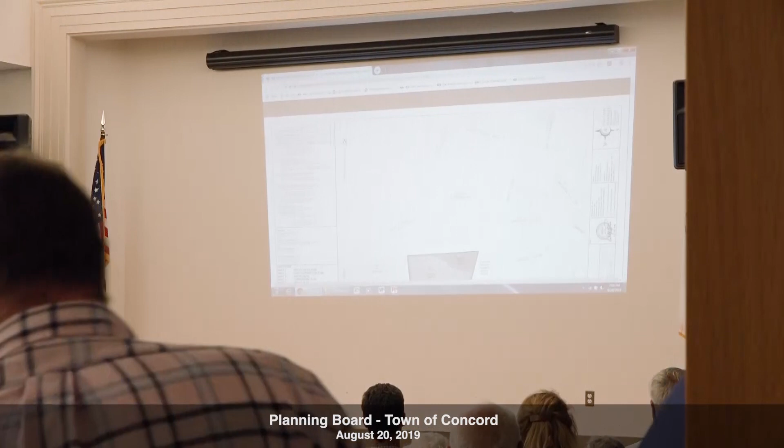At the top left you'll see the map that tells us the number of dwelling units, etc., that you saw before. There's no change to that information. We have 36 units proposed, and we have the required open space, etc.

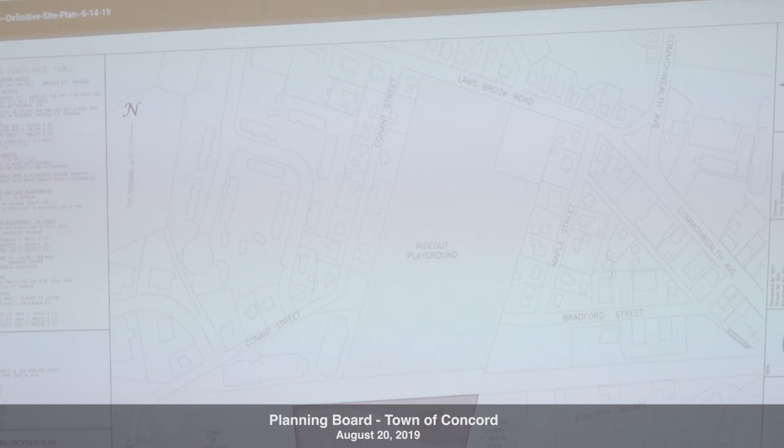As you scroll down, you'll see the development portion, and you'll see Highland Street to the right. We have frontage along Main Street. We have Daniel Hayes Park along the front, which you'll see in more detail. And we also have Center Village on the left-hand side of this location.

We also have the town of Concord land on the back and the commuter rail over here in West Concord. Junction Square open spaces here also, and their plans and deeds talk about keeping that open as a park.

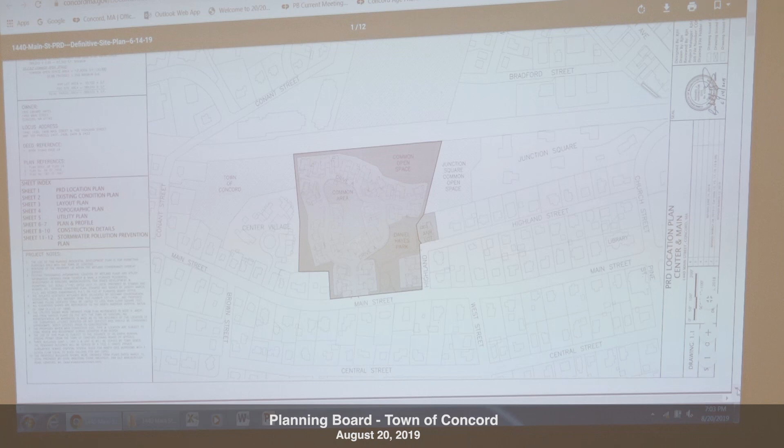Next page please. We've been receiving communication back from various departments and your consultants for the stormwater. We've reviewed those all, and we feel that we can address them with typical comments.

This is your existing conditions plan, and basically what it shows is that along the main frontage of Main Street, we have the sidewalk, the sewer connection, and the water. And then we have two dwellings at this location at the top of the hill, a single family and a two-family. Your record cards show that there's a total of 6 bedrooms.

As we talk further with the water district, I'm speaking with Alan Cathcart, there's going to be a net addition of 3 bedrooms to the town sewer, which is only 330 gallons per day, below the 1,000 gallon per day requirement, so we don't have to go to the commission for that. We just need Alan to do an administrative approval to change from 6 bedrooms to 9 bedrooms for the 3 dwellings. So we have 3 dwelling units today on town sewer from the sewer connection right to Main Street to the sidewalk, and we'll have 3 dwellings tomorrow with that project.

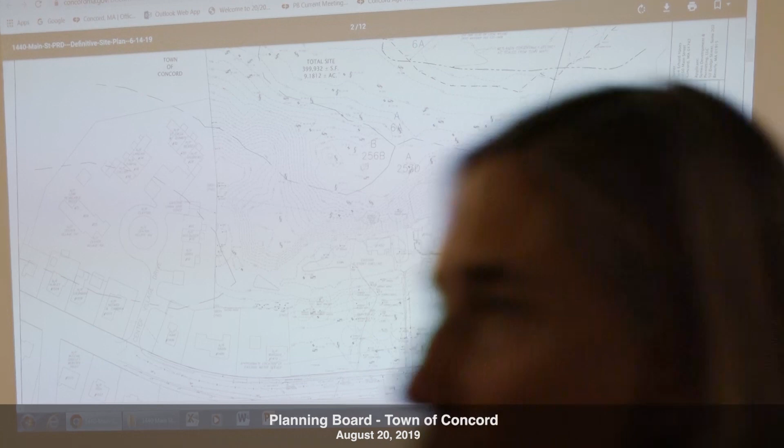The driveway is paved right now to serve the 2 dwellings off of Highland Street to the right. That will be converted to a 5-foot wide sidewalk. The curb cut will still come into this area, which will be the future park. You'll also see this existing path down the back, which we're going to keep as well, making it handicap accessible, as another access point for walkability down to the back of that location.

Topography-wise, we already looked at this in great detail. Left to right is basically flat along Main Street. It's very level along the chain link fence, a 6-foot-high fence along Center Village. It begins to drop down in elevation to the lower area of the back along the railroad tracks, where we have an isolated wetland that's been confirmed and reviewed by staff and the Natural Resources Commission. Next.

This is just the record plan, which shows that we've provided the common open space for Daniel Hayes Park, along Main Street, and also this L-shaped connection so that you can walk from Highland down where the driveway is, and into the front, into the middle. And then we also have open space along the back.

In addition, in talking in great detail with the abutters, the Marquis and the Center Village folks, there was a desire to not just have the 20-foot setback along this edge, but to increase that setback.

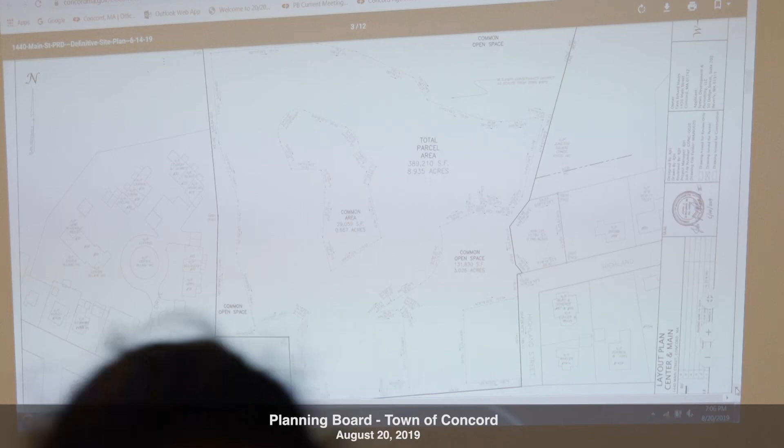The best way to increase that setback is to make it open space. So what we did was curve it away in this detail, and then bump out to this location. The area in the middle is our own dedicated common area, with homes fronting around it, and an open grass plot of land with our septic system underneath. That's extra space, our backyard if you will, but we're letting people come on in. It's an additional benefit you don't typically see in a PRD.

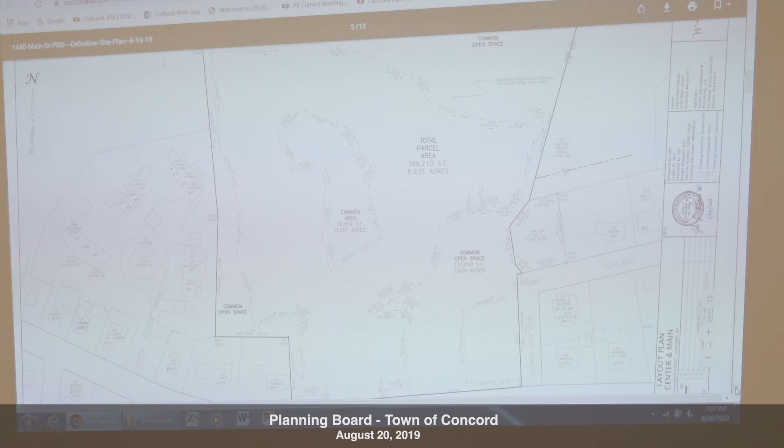If you recall, we looked in great detail at the West Concord guidelines and the basic minimum requirements for a park or patch of grass. Both our spaces meet those requirements. It's about an acre of land from this point, not including the tails, and this area is just over 25,000 square feet. So it's a nice, very large area for active play in that location.

Next slide, thank you.

What we have is the grading you saw before with the sidewalks, with no change except we had a double sidewalk here at the entrance, one going down the back and one into the park. We simplified that into just one sidewalk where the pavement is today. There were minor adjustments to the grading, and as we talked about before, the walkability of the project and making it accessible throughout the entire site.

The one way we achieve that is to stay below 5% grade. As you go from the sidewalk along Main Street, it's very level in the front where the homes are along the entrance, then drops down at 4.6% this way, and also in this direction, down to a low point from here.

Lost my train of thought.

So what we have is the rail station down the bottom, and we talked about the different types of dwelling styles, which Elise will talk about further. We have a paved path down to the bottom for walkability, to travel throughout the entire property by foot or bicycle, and connect to existing sidewalks down to the town center of West Concord. In addition, we share a common boundary line with the town of Concord parcel, which is the open space that was the PRD next to us for Center Village.

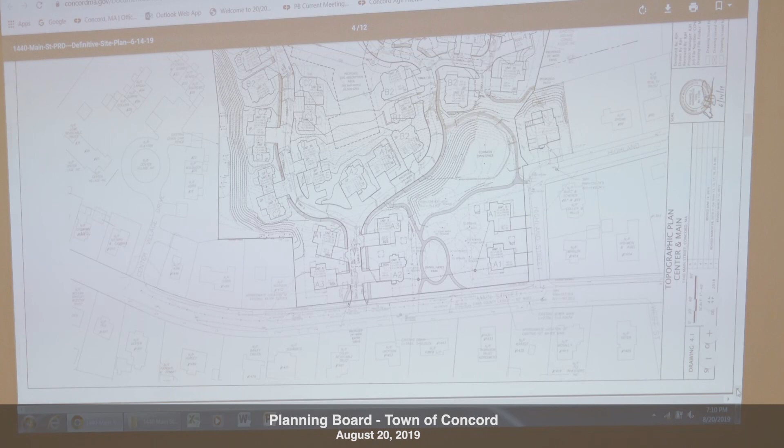So we have a 12-page set. We talked before on a concept plan, it only had 4. So we have additional detail. We have the 2 homes along Highland Street, along the driveways at this location.

Those 2 will be on town sewer along with this house here. The existing sewer line that's there, we're going to reline it and it'll be good as new, and then we'll connect these 3 dwellings to the same location where the current 3 dwellings are flowing to.

The water line is going to come off of the main, come down and loop around the project, and then up the path and tie into Highland Street. The reason for that is so that we don't have a dead end, and it improves the water quality and flow for the entire neighborhood, so that you have water moving throughout and not stagnant.

We'll have fire hydrants along the entrance and at detailed locations along the way, at the right spacing for the fire chief.

You'll start to see that we have a low point here with 2 catch basins, some pre-treatment, and then we have the isolator row and the chambers at that location. We have overflow pipes, then we have roof drywells for these homes at this location, 2 more catch basins, subsurface drainage, 3 more catch basins, subsurface off the tail, low point, a couple more catch basins, 2 on the grass, 1 on the pavement, and those go at this location here.

This left-hand side, basically connecting the dots, if you will. This one is connected here to there, and it daisy chains down to daylight down there.

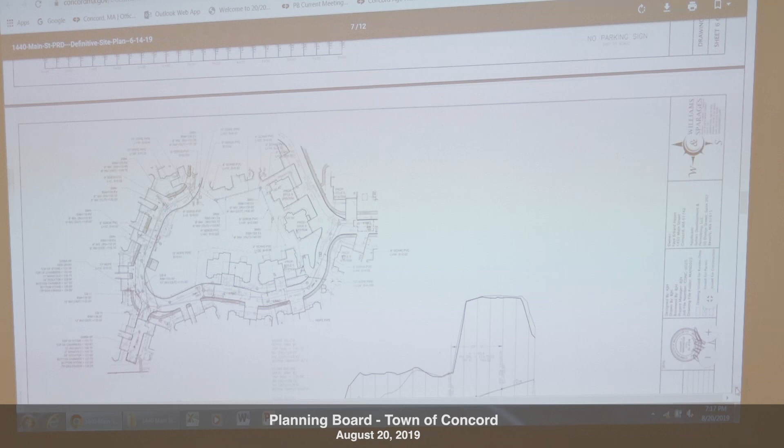With that, I think there's a couple more sheets just to buzz through, Elizabeth. We talked about this, this is just your plan profiles, which shows the grades going down. You can keep going, Elizabeth. And then there's another, the next sheet is the bottom part of the profile with the low point down here, so we're going back up to 4.6%. And you can keep going. So this is the plan profiles.

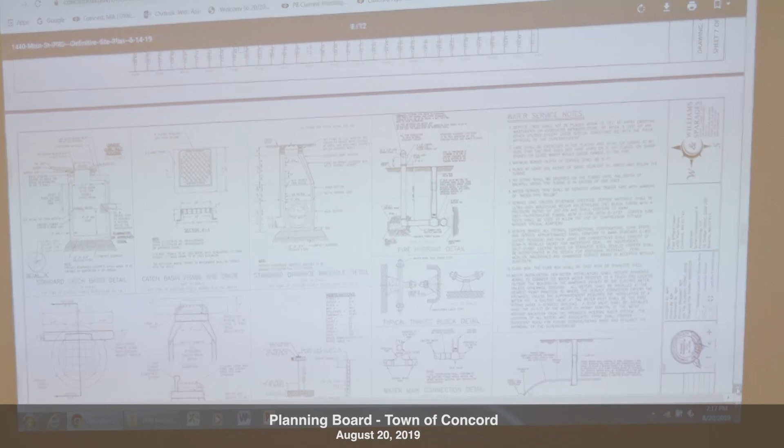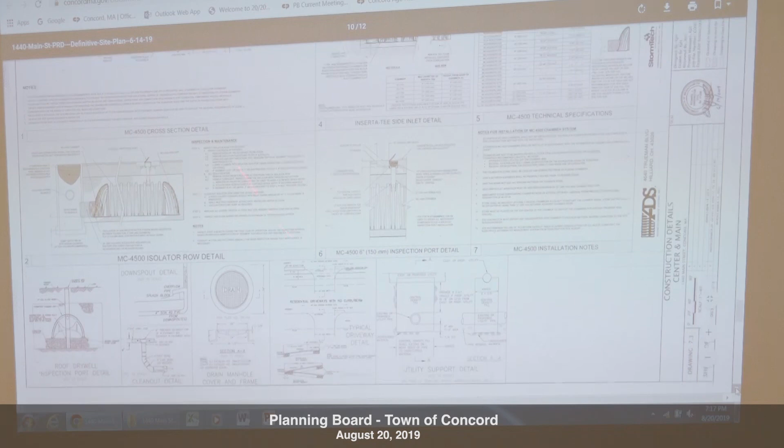All these details are on your engineering website, so all the notes, etc., for all the pavements, sidewalks, tanks, catch basins. And then the last sheet is all our subsurface stormwater and all the requirements for that. Erosion and sedimentation control plans. We talked about having the protection of the mature trees in Daniel Hayes Park. And then Kim Ahern also provided a tree protection detail as well. And these are just more catch basins, silt sacks, all the standard text and guidelines that are from your engineering department. And that basically completes the entire plan set that we have.

And I mentioned that we had the Board of Health response. We talked to Water and Sewer. We're comfortable that we can meet their requirements. There were some comments from the town planner that we believe we can also address.

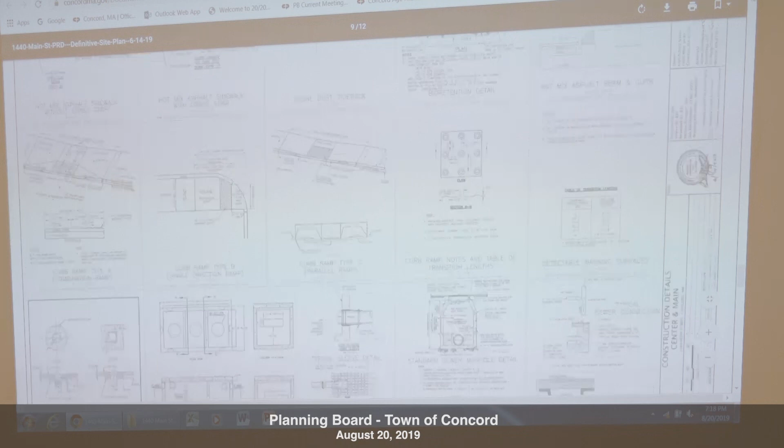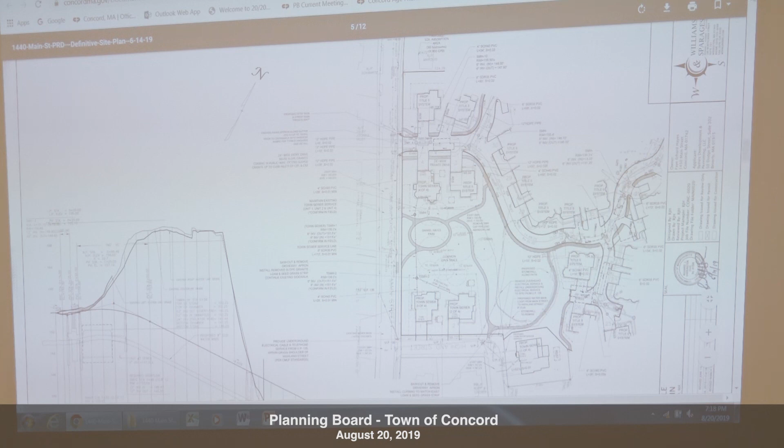In regards to some of the concerns about what's public and what's best for this open space, typically this type of development has a hybrid type of open space where the park is very beneficial. It's along Main Street, and that is a valuable public open space in this area. Is there a need for public access along the sides? Probably not, because it's more to protect the abutters. There's a 6-foot high fence that the abutters wanted to keep, so there's no connection over here. We did offer that in earlier versions, but it was decided that that was not a benefit for them.

So we're maintaining the trees along the top. We have a flat area for additional landscaping along this. And by lowering an elevation over here for these homes, we're also protecting the views across the street, which we had some comments on as well. So you're basically closing the curtain once we lower that area when you're looking in this direction.

And what I'd like to do is basically allow, is it the top at least, or is it? Do you want to go through anything? The architectural plans on file? Yeah, it should be.

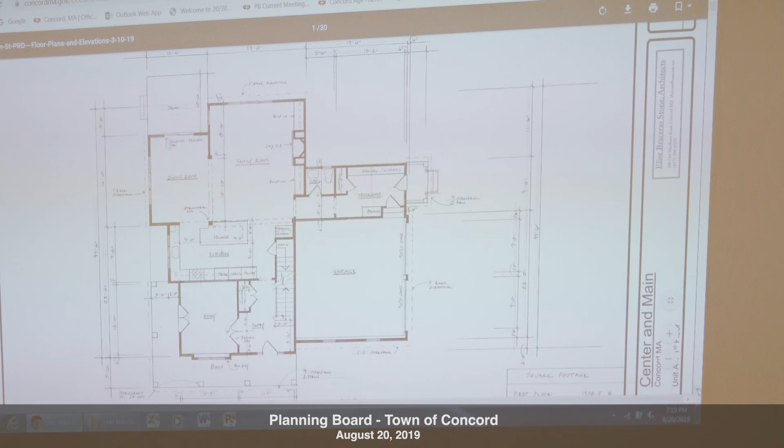So Stout updated her plans based on the last conversation at the meetings, and she can go into detail about that. What you'll find is there are detailed elevations and dimensions along all these sides of the buildings, and we updated our plans accordingly for that.

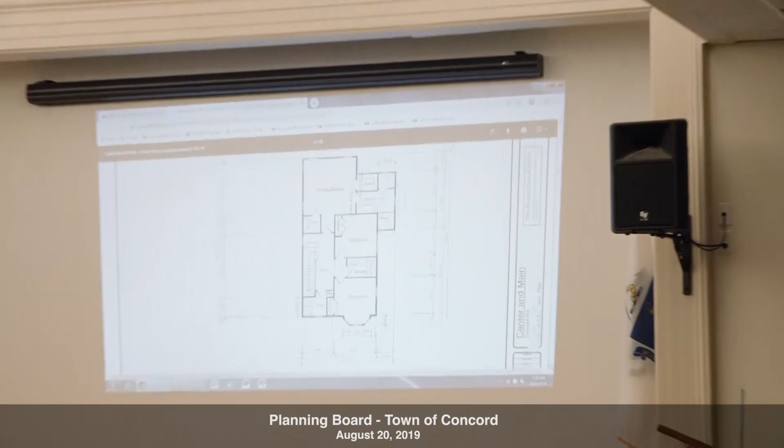So this was A1. Maybe next. So these are, this is the side going in from the garage. So these are just the 4 elevations of A1. So we'll just continue through to A2. So each plan is slightly different. I tried to use elements that you see around Concord so that they all looked a little different. They're similar square footage, but using bays and porches and that.

Trying to get the garages to be set back from the houses, using a village colonial type architecture. We gave them side entrances, especially with the side loading garages. Along Main Street, all the garages will be side loading, so you won't see the garages from Main Street.

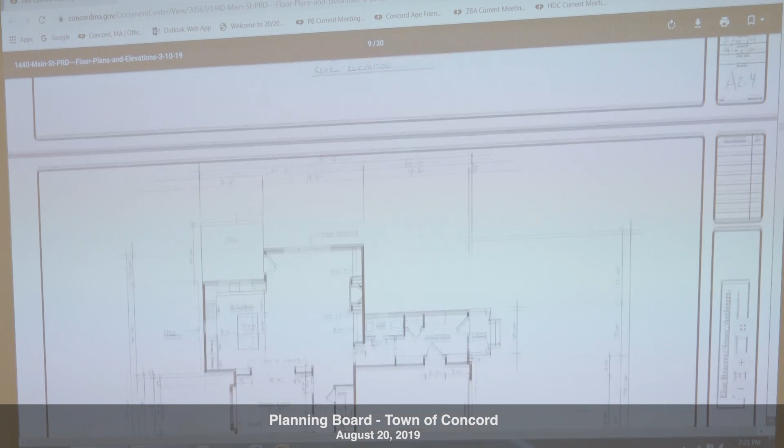So we can go down to A3 now, and keep going. This is A3, so we've used a hip roof. There's a lot of hip roofs around West Concord with just a front porch, not the wraparound porch, dormers on the garage, etc. On some of them we've gone over the garages, and some we haven't, to keep the profile a little lower.

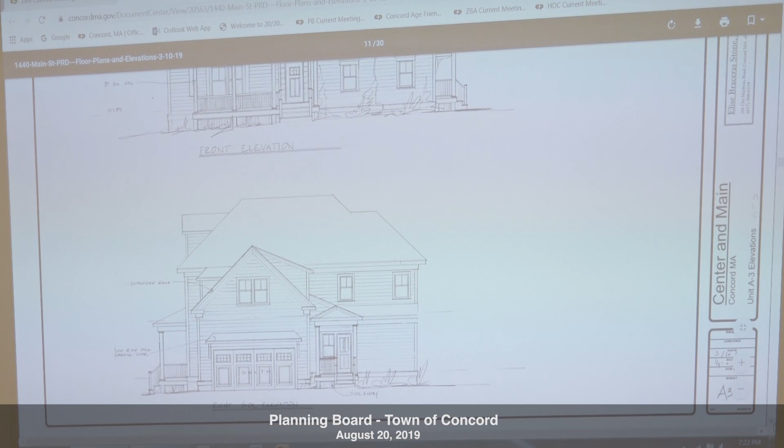A1, A2, A3, you'll see them sprinkled throughout, and the idea is that we really are going to vary them, all the ones shown in the plan. There'll be different sidings, colors, roofs, and porches. So those are the A units. Keep going, these are just the 4 elevations of the A3s.

So the next units are the B units, and originally, if you remember, we had the B units as duplexes. They're mostly along the back of the site, which will be very hard to see from Main Street. I don't think, Rich, you'll ever see the back at all. But they're going to be closer together, and we separated them, so some have 1-car garages and some have 2-car garages.

Again, using a variety of siding, styles, windows, etc., we will vary them. So I thought of this as neighborhoods. One of my daughters lives in Cambridge, and you drive down her street and see how triple deckers have been customized over the years, and they're all the same but they all look different at this point.

So I looked at that as this type of neighborhood along the back. So the B units, there's B1 and B2, and we could vary it by going over the garages and not. These are 3 bedroom and 2 bedroom units.

So we can go through these. Some of the B units, because the way the land drops off in the back, will be walkouts, so there will be some walkout opportunities. This will be down by the train, overlooking there. It will give them some lower level living space. Again, using bays and trying to make it attractive from the back as well, so it didn't look too boxy.

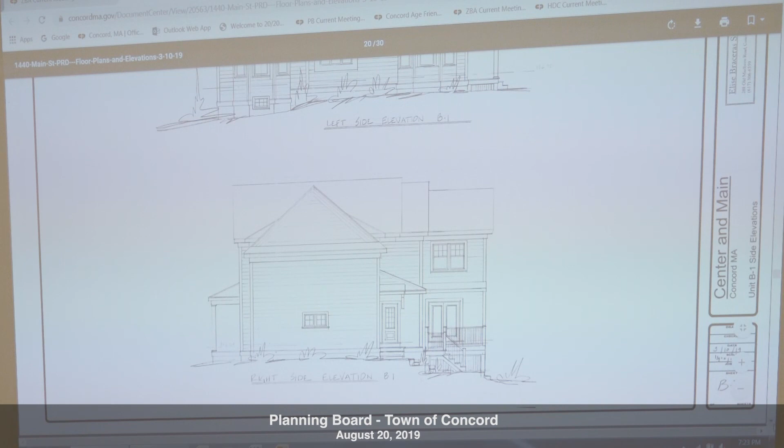So those are the B units. The next units we have are the C units, and these are the smallest units, the duplexes with single-car garages. We put the garages in the middle so they could have the most separation as living units, and feel like they could have light on 3 sides for each dwelling unit.

These units, one will have a master on the first floor. They can actually vary depending on what the demand is. They could both have masters on the first floor, or there could be a master above. These are 2-bedroom units, for the single person or downsizing couple, with a single-car garage, but having them look a little more cottagey. These are on the left side, again to keep a low profile towards the duplexes that are the existing village there.

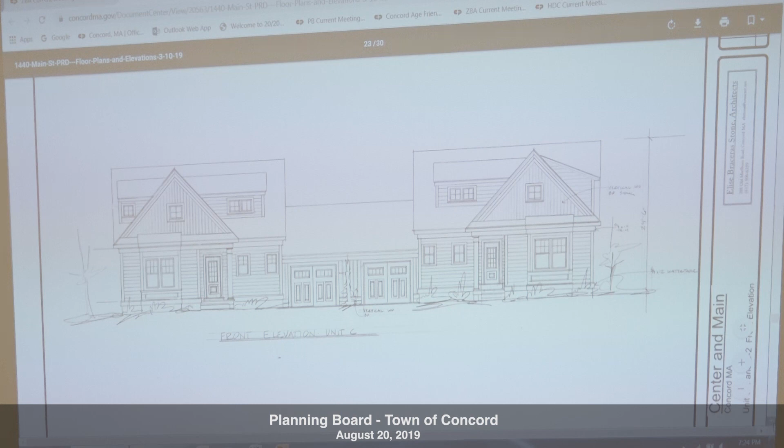So we can show these. When I showed this one, I did show on the plan as if one has the master above and one has the first floor master. Did we already go by that plan?

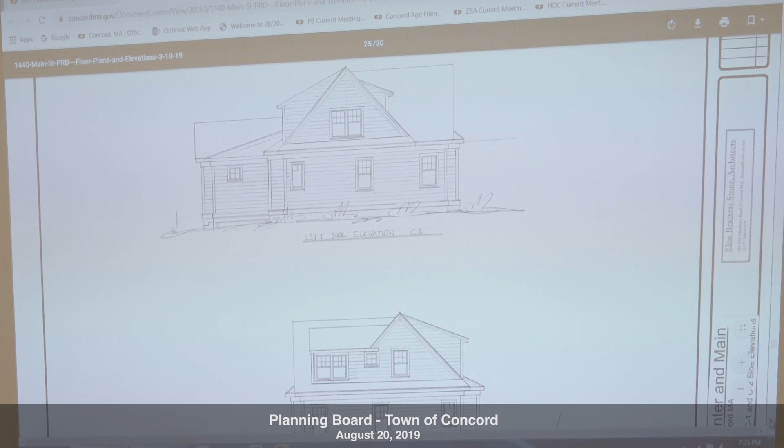So those are the bays, and those are the sides. So this is the first floor plan. You can see the one on the left, it doesn't go out as much, but you have the master. Oh no, I'm sorry, this is not it, this is the next unit. So we must have gone by that. Do you want the floor plan? Yeah, maybe show the floor plan of C, the first floor plan.

So those are the second floor, and here are the first floor. The one on the left has the master on the first floor, and the one on the right has the master on the second floor. Those are about 1,700 to 1,800 square feet.

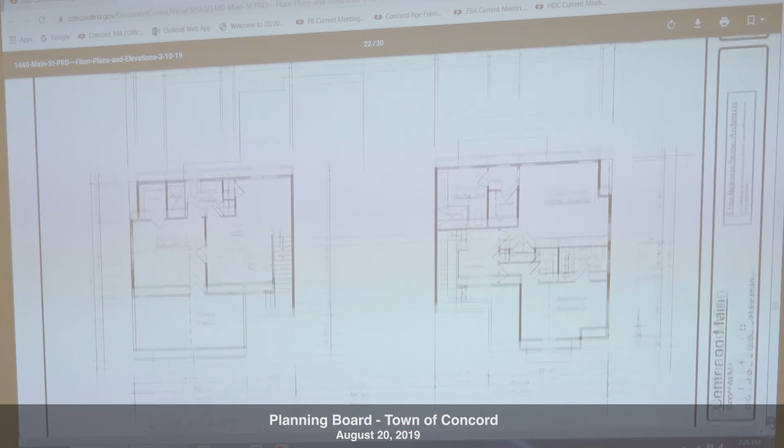So then the last units are the D&E units, there's two of them. Those are also a duplex, where you enter one duplex on the front to the bottom left, and the other unit you enter on the right. The one on the right is a smaller unit with a single car garage, and the one on the left has a 2-car garage. So really, when you look at it, it doesn't look like a duplex per se. Those two are both on the corners.

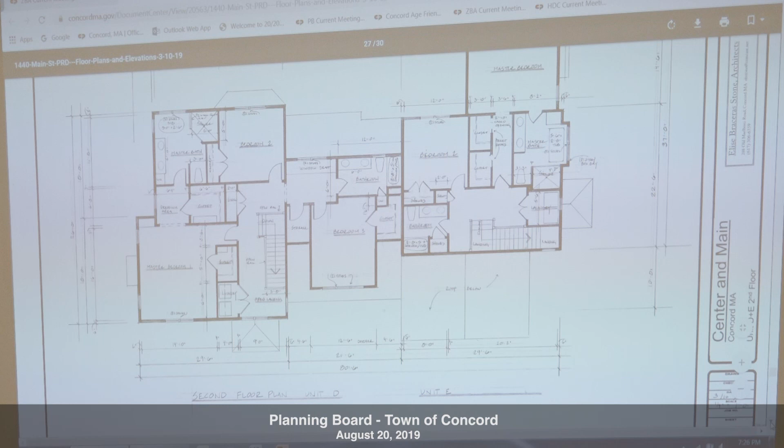So we can show the next one. The one on the right is a 2-bedroom unit, and the one on the left is a 3-bedroom unit. Again, just trying to get the architecture right, so it doesn't feel like all the garage doors are together. I think those are all the units.

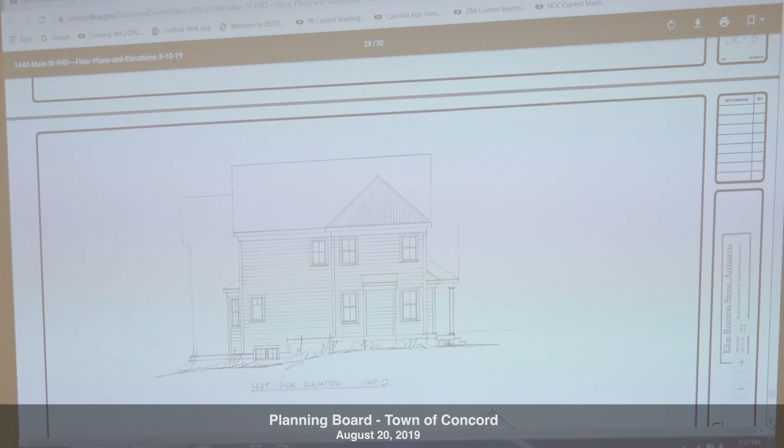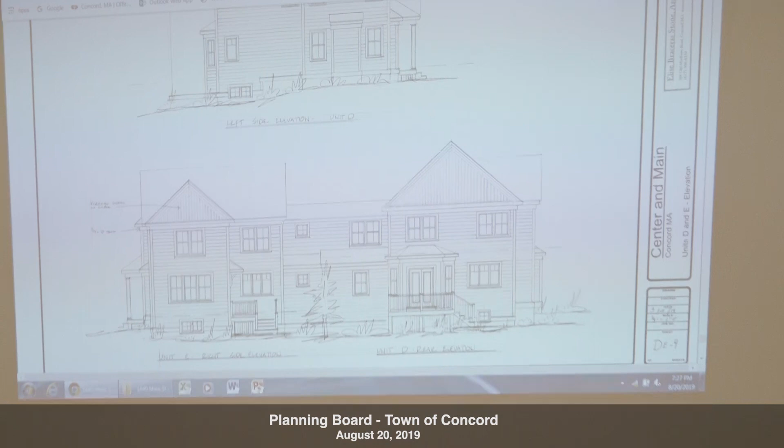Questions from the board?

So if we look at the town planner's report that came up today, some of the open issues—one that I don't think you addressed directly, you did refer to snow, but you didn't really talk about the snow removal plan for the site, so that was one of the open issues listed.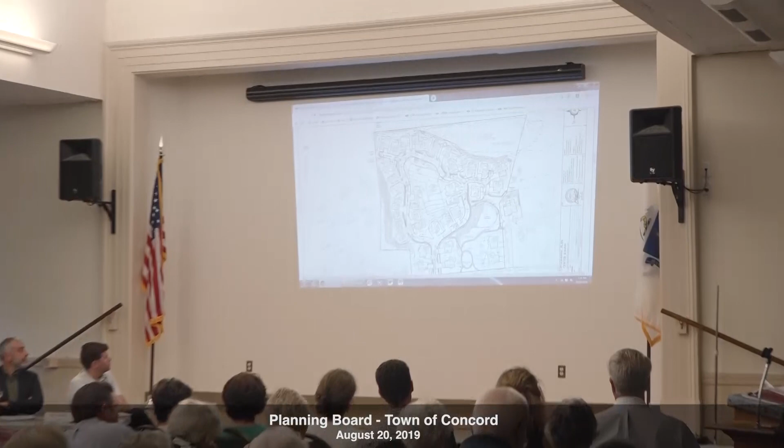This is very valuable for the public to use also. This is also valuable as open space for harmony with the neighborhood and conservation purposes. We're in agreement that it shouldn't be under a conservation restriction just because it's in zone C. Usually they think in zones A and B, they get involved with conservation restrictions because they're larger plots of land with natural resource features. So this would be a perpetual restriction, monitored in a similar manner, but not a conservation restriction - that's what the conservation agent would have to look at.

And then could you review again the square footage or acreage of the different sections of the common open space that are being provided? So the peripheral, the wetlands, and the isolated wetland is the park/green. Certainly. A few meetings ago, after reviewing the West Concord guidelines for park, we made sure that the criteria, the lines associated with the area got those dimensions. And so this is over about an acre of land in this shape here.

And then we have a connection down the side in common with the open space on the abutting property. And there's also open space along the abutting property of Center Village. In my experience, it's always best to marry up each side of the wall or fence with open space and have that common area as opposed to the house being closer. So this will be a common area, then we have a 20-foot strip around the back, and then the wetland area that will be common open space as well. And that meets, as you know, what the rules say - everything that's not a building or reserved for other aspects of access can be common open space, and you just need 25%.

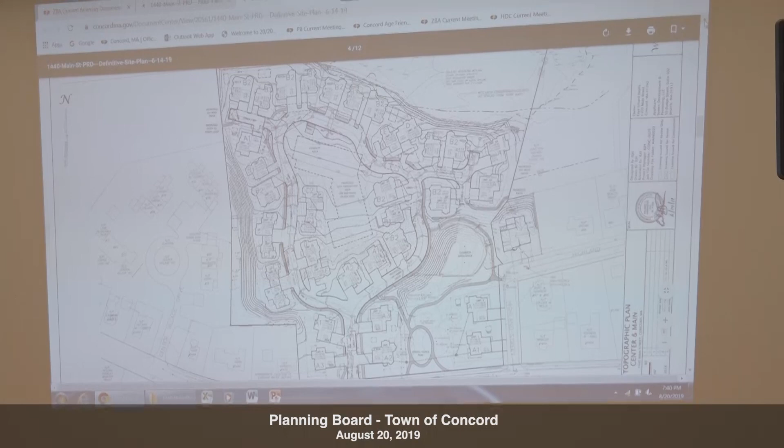So going back to common open space, you mentioned the 25% requirement - there's also in 10.2, 9.1, all the various things that would be the goals of the open space. And you saw the planner's memo and it kind of said no, no, no, and no. Could you address - why we agree, there's pretty much that's a paintbrush across the entire town - how does that apply to a zone C place? What we have is the value of the park, the conservation aspects, and respect of the neighbors, along with the conservation of the back as well. So without additional detail, those parameters are the most important for this.

And when you're in more of a smaller lots, city feel, you're not looking for that 50-foot dimension. 10, 20 feet is at a premium also. So this meets that goal of providing key locations where the open space is, based on all the locations of the abutting decks.

And we turned our houses so we're not looking at each other. A tremendous amount of thought went into the people around the property, and also making it the best possible for the open space.

Yeah, you can tell a tremendous amount of thought went into it, and you seem to sort of maximize where it's put, given the constraints of the topography of the lot and the incredibly high density of houses that you want to be able to put in.

Well, what we have is when we sit down as an engineer, it sounds like the basic requirements are 25%. The time before, there wasn't really happiness with the 26% of open space, so we made it 33%. We feel that made a better buffer along the perimeter. At the last meeting with the board, there was acceptance on this plan, and then we left and came back, and you basically have the same picture.

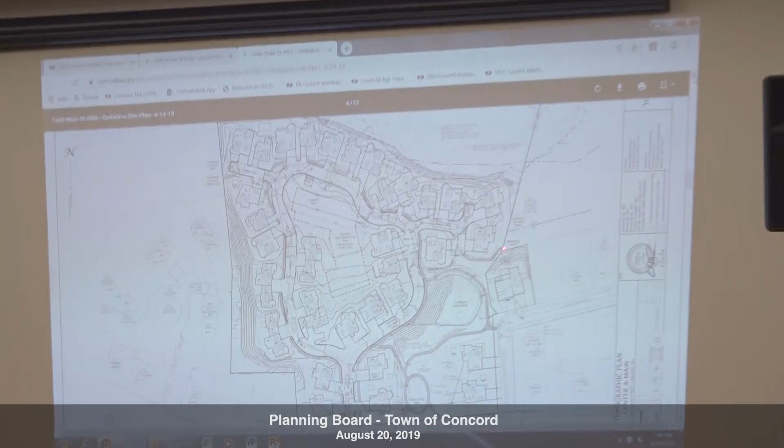And there's not an existing path on that other private lot? No, if you look at their plan of record, it says maintain as an open park, open space. Have you reached out to them about connecting with a path? We have not - that was an early ask by the planning director, to try to allow town land to connect to this open space parcel, and we said absolutely, we'll provide that. We've been able to maintain that through every redesign we had. But you haven't reached out to the abutter? I guess we can do that additional investigation.

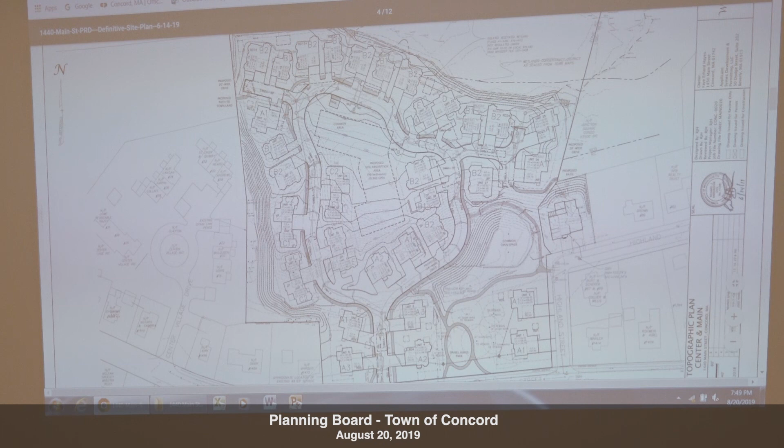I do have one other question, sorry - regarding the logistics of removing the earth, one of the questions raised was the number of trucks involved. At what point do you specify the plan for earth removal - how many trucks, where they go? You'll have that at the next meeting.

I would love to see, and it would be really important for the next meeting, to see those basement plans, including ceiling heights, and whether there's any bathrooms or anything in the basements. Certainly, I'd like to address that - usually with basements in developments like this, similar to Black Birch, we only finish basements when buyers ask to finish them after purchase. So they're really just open plans with an area for a mechanical room. We would never show a bathroom unless it was asked for.

The reason I'm curious is because you're one bedroom away from that limit. Sometimes on plans we see these 'magic rooms' or 'bonus rooms' - I haven't seen them here, but I want to get an idea of the look and feel to see how easy it would be for somebody to add one or two bedrooms in the basement. There's absolutely no bonus rooms in any of these plans, and in any basement you could put a bedroom, but these are just open plans. We will show them, and there's no intent to put any bathrooms in basements at this point.

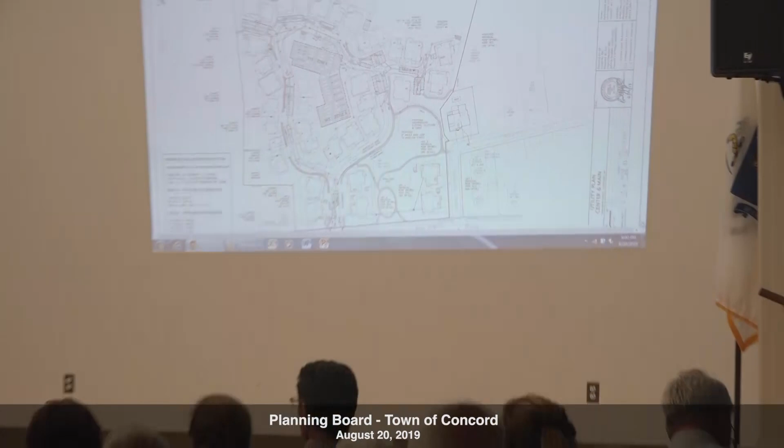Yeah, so I think at this point we've gotten our input from the applicant, and I just want to remind everyone what our job is here. We've been through several rounds of discussions with the applicant, and as the planning board, our job is to provide a recommendation to the zoning board of appeals for whether they should grant a special permit for this project. Also, to provide additional color, if we didn't feel it should be granted in its current form, what modifications we would expect to be made in order to make it fit within the spirit and the letter of our bylaw.

But before that, what we will do is march through each of the criteria to give our planning director some guidance for the report she's going to write up—our draft recommendation—which we will then review at our next meeting along with additional input from the applicant. So that gives you a sense of where we are in the process and what we expect to proceed with from here.

But I think before we go through those deliberations, this is a good time to hear comments from the public. Once again, keep in mind we've got a lot of people here, we've been talking for about an hour, and we're by no means done. There have been comments made in the past, letters received, lots of input from the community, so what we especially appreciate is any new perspectives or insights based on new information or things we haven't yet considered. Repeated comments are of little value for all of us in terms of our time tonight. So I welcome members of the public who have such input to step forward. When you do, announce your name and address, then please share your remarks.

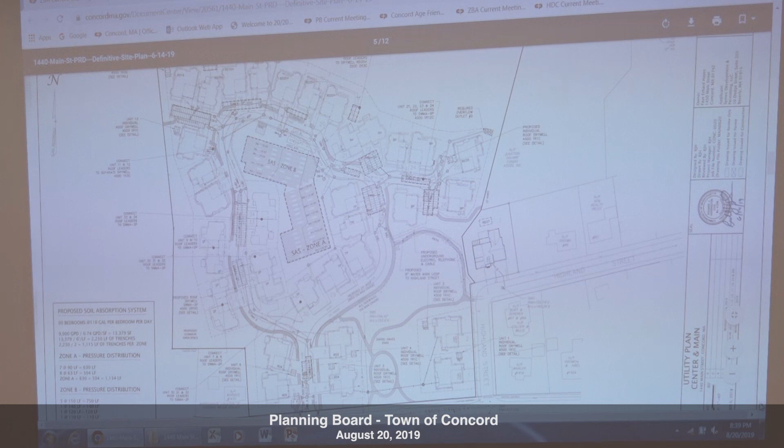As you drive down Main Street, you're not going to see anything behind that red dot. Everything behind here is at a much lower elevation. You will not be looking at Main Street. There was careful planning put into this so that we limited the amount of houses to keep the character of Main Street, which we worked on with the planning board.

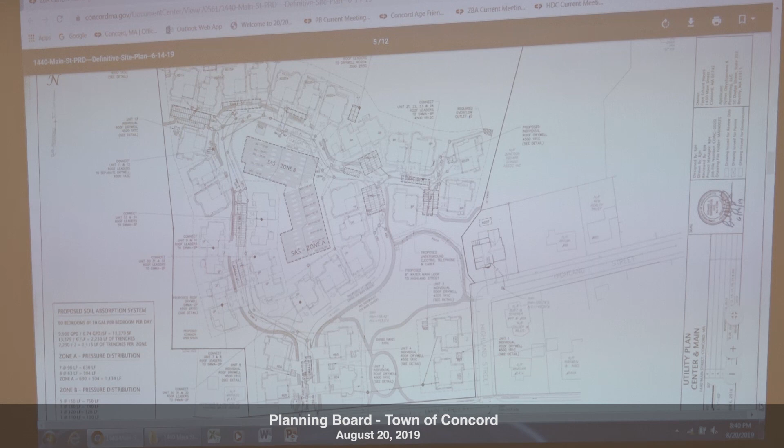The last point I want to make is the traffic was reanalyzed in September. Those counts aren't really up on the website, but maybe we can get those put back up. They were revised and recounted in September—some traffic decreased, some increased, but it was redone during the school year. On that note, I'm going to let Rich take over the rest. I got all the notes.

Thank you, Mr. Chairman, I'll do my best here. 55 Highland Street asked about snow removal—it's a condominium association and it'll be monitored by police and fire. They drive through, and if there was an issue they would contact us and we'd be proactive on that. Open space protection: Ingham Lane down toward Malden was also a PRD.

The land near the Assabet River was protected under conservation restriction. The land in the park area was also a restriction. So with that, I'm confident we can come to a way to protect the open space.

The number of bedrooms is mentioned in the master deed of the condominium. Every house plan submitted by the applicant to build each house is reviewed by a special form that the Board of Health goes through, counting rooms, etc., confirming and signing off on the number of bedrooms, which gets recorded at the registry. So it's very efficient, and the count is immediate.

Regarding Gary at 57 Central, the HERS rating—Jeff needs to get that to you. We know it's on the list, and we apologize it's not there yet, but it will be provided. 20 Conant Street asked why only one affordable unit. Mr. Chairman, you did an admirable job on that, you should be proud of yourself. Thank you, probably haven't heard that in a while.

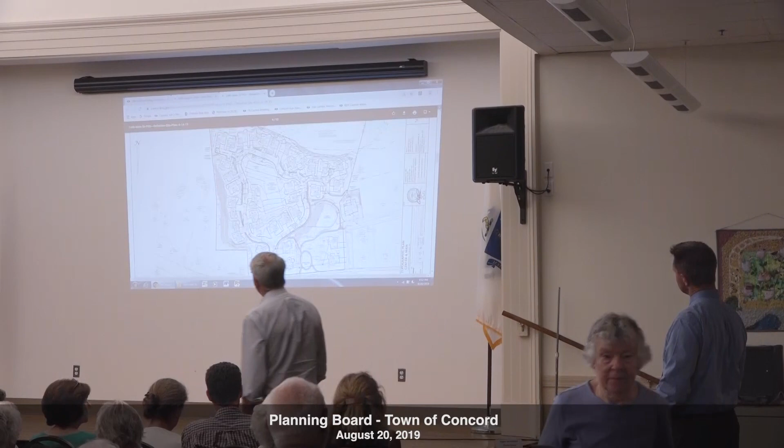Could you go back a couple of slides? Yeah, she went - oh, right there, this one. Now, I can be pretty loud, so.

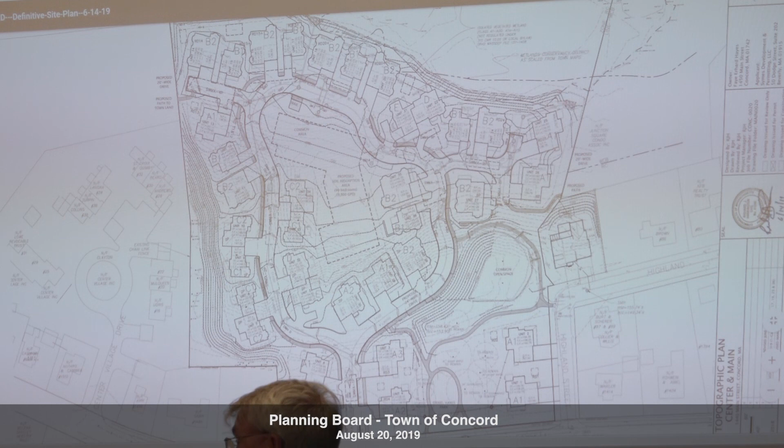Part of the deliberations that we had - originally, this was a much larger area, and what we did originally, we had these houses lined up pretty close here. So you're right, it's not going to conform exactly. But there were deliberations between this board, us, and the abutters to move these houses further away and put some of the space that existed here over there. As you can imagine, if we push this way, this gets pushed that way, and all of a sudden - we'll demonstrate that - but since you weren't here for all the hearings, I think it's important to put that in context.

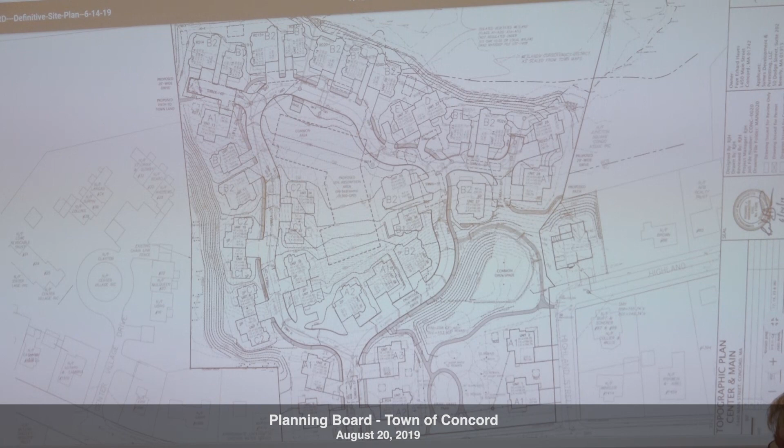I did review the entire file, including your application from a couple months ago. Great, because if we have to, we can. Pardon me, is my request clear - that you explain how your required open space meets the standard in 10291 that you are proposing? Yes, thank you.

There was a first question that wasn't answered. Your name again, just for reminder.

What if you would need to repair the septic? If it should fail, how would it be addressed? I thought you tried to respond right on the spot. I think I did, and then we just rolled the questions up.

A reserve area is provided in the same location, and if it does fail, it would be replaced in the same outline. Or if capacity becomes available down the road and the treatment plant's big enough, we're required to connect to that—the rules say you have to. It's one or the other. When it does fail, you ask if there's capacity at the treatment plant. If they say no, you put the system on the site, which we have room for.

You're saying you would tie it to the town septic system? Again, I didn't want to open up that nest, but it's in the letter from the Board of Health, and I quoted the Title V section that says you have to check with the treatment plant before you put a system back on the ground.

I was just wondering how you would get heavy equipment in there if you had to. It's not you—was it the association at that point? She's confused.